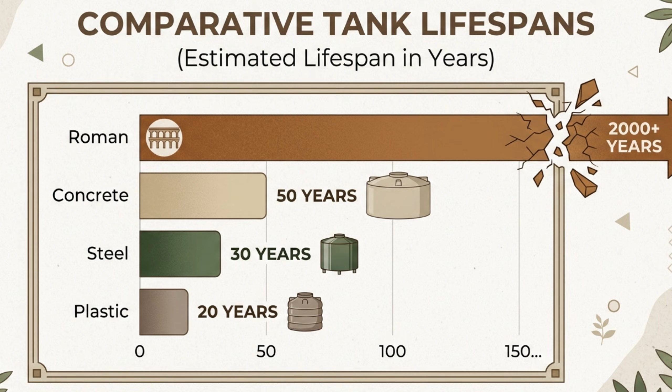There is a water tank in a small town outside Naples that has held drinking water for 2,040 years. It is bigger than a basilica. It cost the Romans almost nothing to line, and the recipe for the material that makes it waterproof is sitting in a book that has been in print since 1547.

A modern concrete water tank, the kind your county will permit, lasts about 50 years before it cracks and leaks. A plastic cistern lasts 20. A galvanized steel tank lasts 30. The Roman version has outlasted the empire that built it.

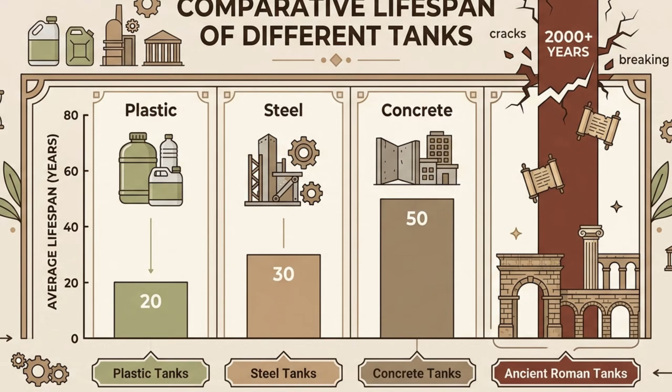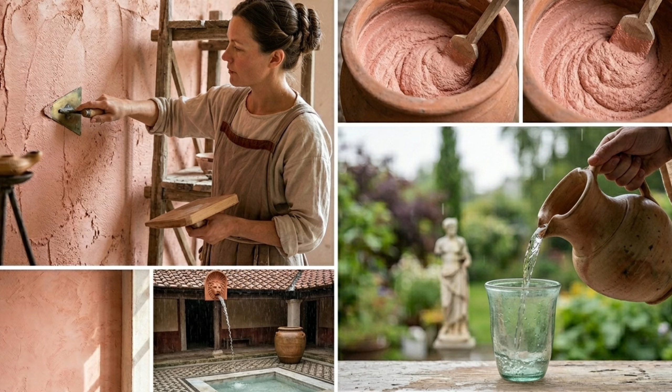Archaeologists at the Cambridge European Journal of Archaeology rebuilt the mortar in a lab 2 years ago. They confirmed what farmers in Spain, Portugal, and North Africa have known for centuries. The lining costs about $8 to mix per square foot at modern hardware store prices. It self-heals, it improves with age, and it can store rainwater clean enough to drink for an entire year without a single chemical additive.

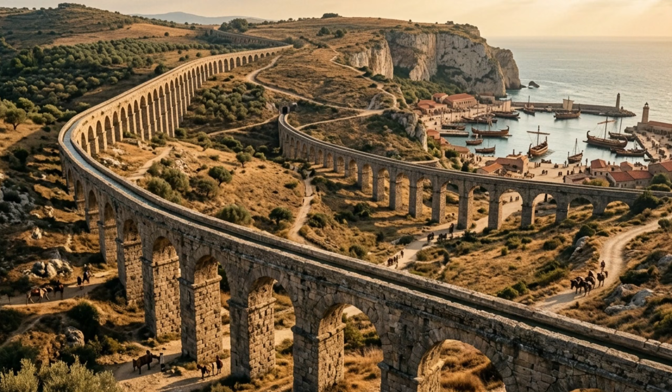So Augustus, the first emperor of Rome, ordered the longest aqueduct in the ancient world. 96 kilometers of stone channel from a spring at Serino, sloping down by gravity, ending at the top of a tuff cliff above the harbor.

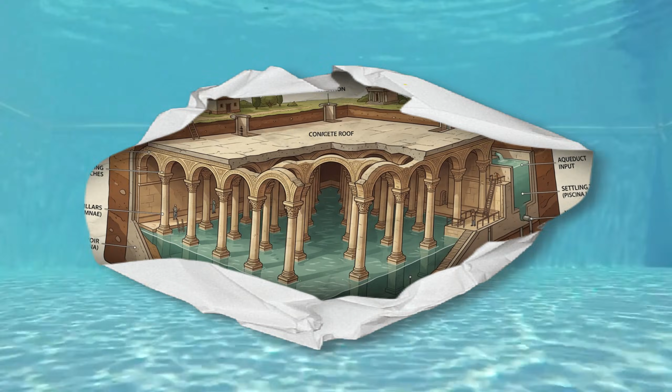And at the end of that aqueduct, they built something the locals would later call the Piscina Mirabilis, the wonderful pool. It is a single underground room carved into volcanic rock, 70 meters long, 25 meters wide, 15 meters high. 48 pillars holding up the roof. Capacity 12.6 million liters, about 3.3 million gallons.

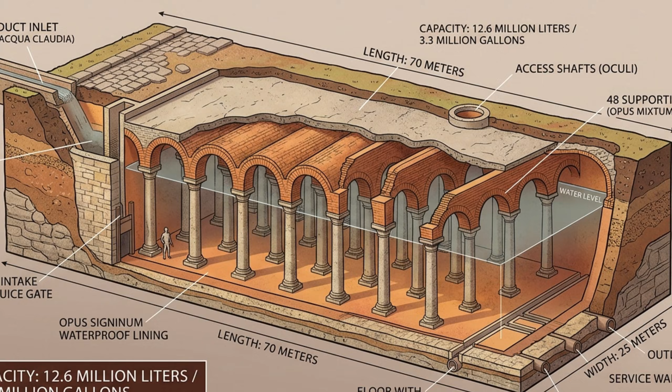Enough drinking water for 10,000 people for almost a week, with no aqueduct flowing. It was finished around 12 BC. It is still standing. Now here is the part the YouTube engineering channels never explain.

The pillars are volcanic stone. The walls are brick. The vault is concrete. None of that is special. You can do any of it badly. The miracle of this building, the reason it has not leaked in 20 centuries, is one thin coat of pink mortar troweled onto the inside walls.

The Romans called it Opus Signinum. To your eye, it looks like rough pink plaster. At the molecular level, it is something else entirely.

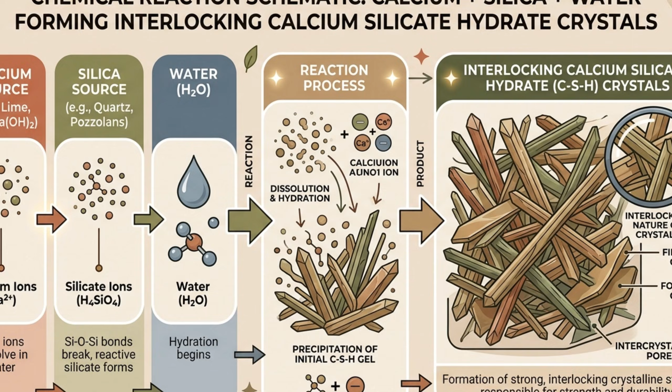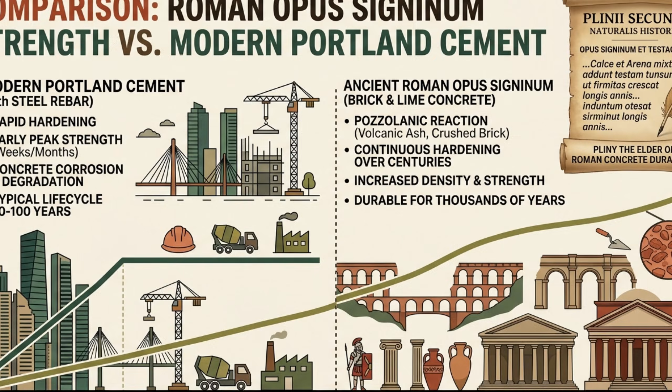It is lime, mixed with crushed terracotta pottery in a very specific ratio. When water hits the calcium in the lime and the silica in the broken pottery, a chemical reaction starts. The two minerals lock together into a compound called calcium silicate hydrate. That is the same compound that gives modern Portland cement its strength, except the Roman version keeps reacting, for years, for centuries. Meaning, every time the lining gets wet, it gets stronger.

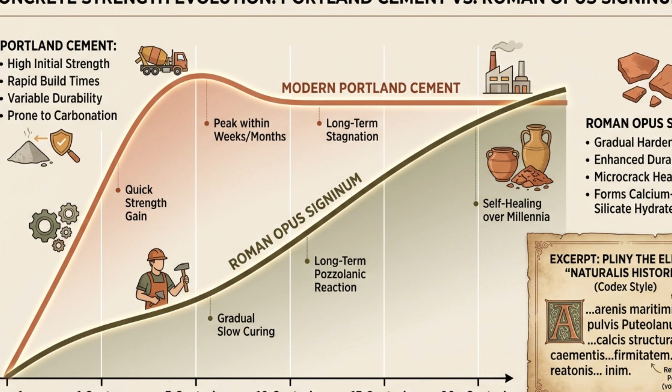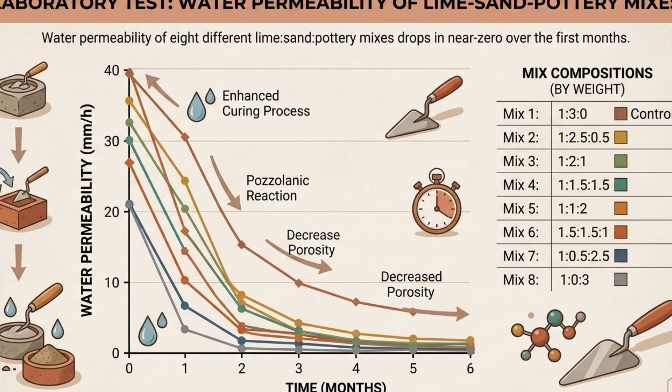Pliny the Elder wrote the recipe down around 70 AD. The Cambridge experiment in 2024 tested 8 different mixes of lime to sand to crushed pottery. The team confirmed that the right ratio creates a surface so dense that water permeation through the lining drops to nearly zero within the first few months of use.

The physics do not negotiate. You cannot evolve around a chemical bond. The lining does not biodegrade. It does not rust. It does not need a service contract. There is no filter to replace. There is no membrane to puncture. There is no pump motor to burn out. It is just stone, slowly turning into harder stone.

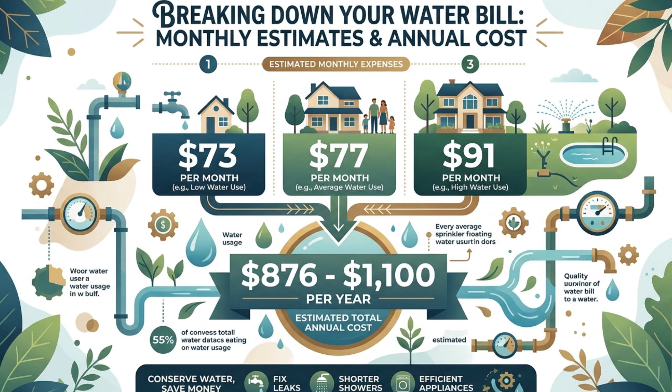And here is where the conspiracy starts. The average American household pays $73 a month for water. A family of 4 in California pays $77 a month. A family in West Virginia pays $91. That is between $876 and $1,100 a year, just for water.

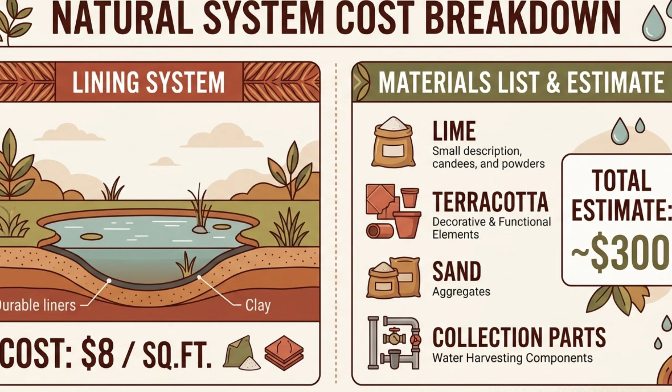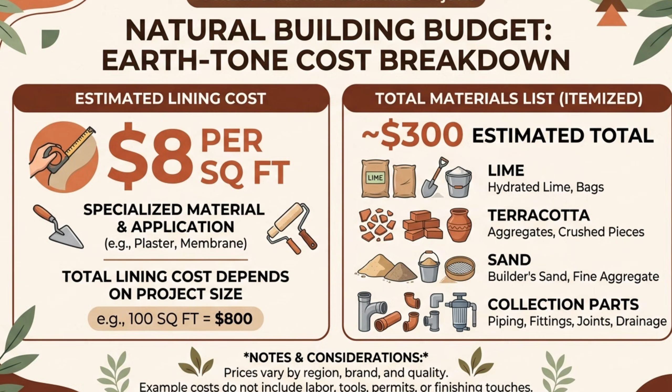Over a 30-year mortgage, that is between $26,000 and $33,000 for something that falls out of the sky onto your roof for free. A 2,000-gallon Roman cistern, sized for a family of 4, costs about $8 per square foot of lining at modern Home Depot prices. Total materials around $300 for the full build, including hydraulic lime, crushed terracotta, sand, and the food-grade collection components.

So why is every house in America plumbed to a municipal water line? Why is the bottled water industry worth over $300 billion worldwide? Why does the average American buy 167 plastic bottles of water a year at a markup of 2,000% over tap water, which itself was free water you already paid a utility company to deliver?

Why has Colorado, until 2016, made it functionally illegal to collect more than 110 gallons of the rain that falls on your own roof? You already know the answer. It is not because the design does not work.

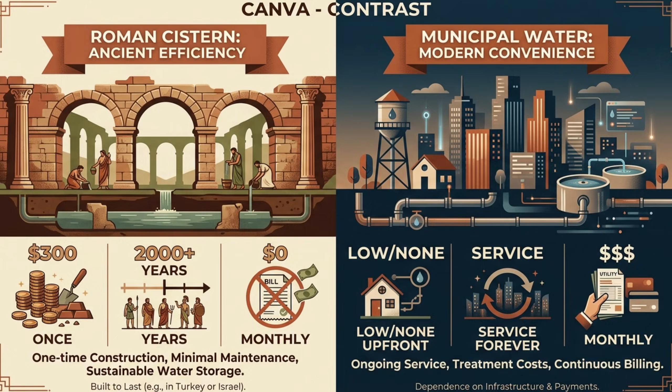The Romans built 10,000 of these across 3 continents, and 100 of them are still functional today. That's because a water tank that lasts 2,000 years, costs $300 in materials, and requires no monthly bill, is a terrible business model. That is not a coincidence. Here's how you build one.

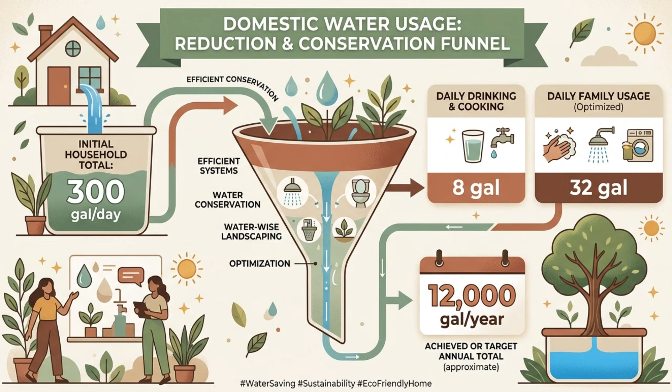Step 1: Sizing. A family of 4 uses about 300 gallons of water a day for everything, including showers, laundry, and the toilet. For drinking and cooking alone, the number drops to about 8 gallons a day, 32 gallons for a family of 4, roughly 12,000 gallons a year. A standard asphalt shingle roof of 2,000 square feet in a region with 20 inches of annual rainfall collects about 24,000 gallons a year.

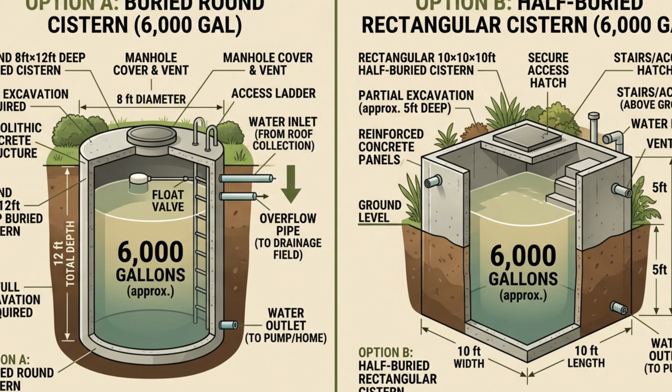Twice what you need for drinking, with overflow to spare for the garden. So your target cistern, sized for drinking and cooking with a 6-month safety margin, is around 6,000 gallons. A round chamber 8 feet across and 12 feet deep buried in the yard, or a rectangular concrete box 10 feet by 10 feet by 10 feet, half buried.

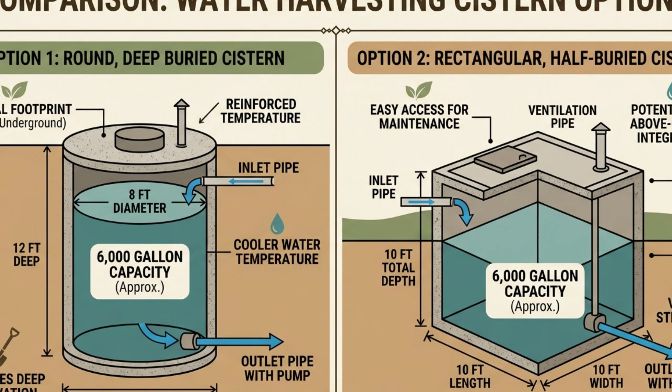Step 2: The shopping list. Hydraulic lime, sometimes labeled natural hydraulic lime or NHL 3.5, is available at any masonry supply yard for about 30 cents a pound. You will need roughly 200 pounds for a 6,000-gallon cistern, $60.

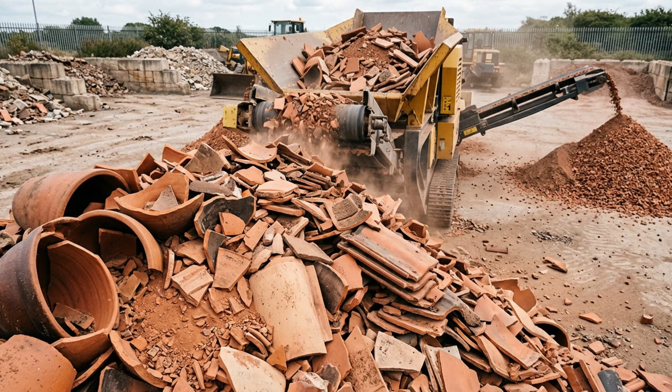Crushed terracotta, called chamotte by archaeologists, comes from broken clay pots or unglazed clay roof tiles. Free if you scavenge, about 40 cents a pound new from a pottery supply store. You will need roughly the same volume as the lime, another $60 worst case. Mason sand, the fine kind, not concrete sand, about $6 for a 60-pound bag at Home Depot. You will need 3 bags, $18.

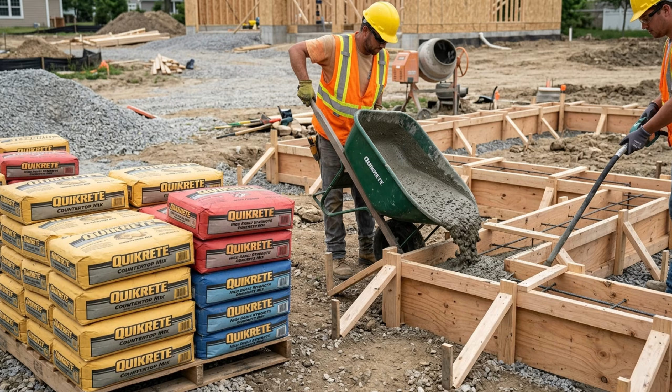The structural shell of the cistern can be poured concrete, block, or even bricked masonry. Standard Quikrete, $8 a bag, 25 bags for a 6,000-gallon vault, $200.

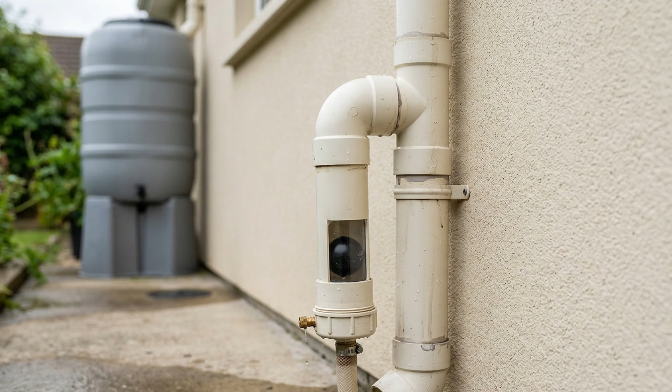A first flush diverter, the modern equivalent of the Roman Piscina Mirabilis, the small settling basin in the floor, throws out the first 10 to 15 gallons of dirty water off your roof at the start of every rain. $38 on Amazon. A simple ceramic candle filter for the final drinking water, the kind used in Berkey-style countertop filters, $45. This is the only consumable in the whole system; one candle filter lasts about 18 months.

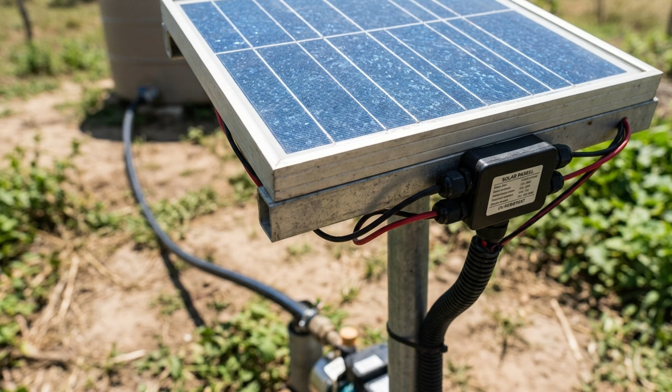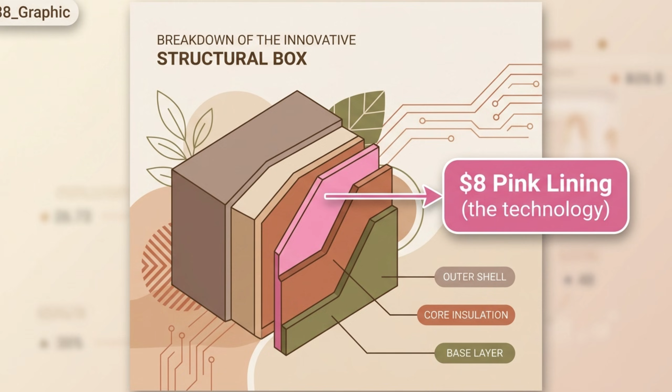A solar-powered shallow well pump, if the cistern is buried and you want pressure at the tap, $80 at Harbor Freight, optional. The Romans used gravity. Total materials cost for the full system: around $410. The $8 number in the title is the cost of the lining alone, the part the Romans considered the actual technology. Everything else is just the box that holds the water.

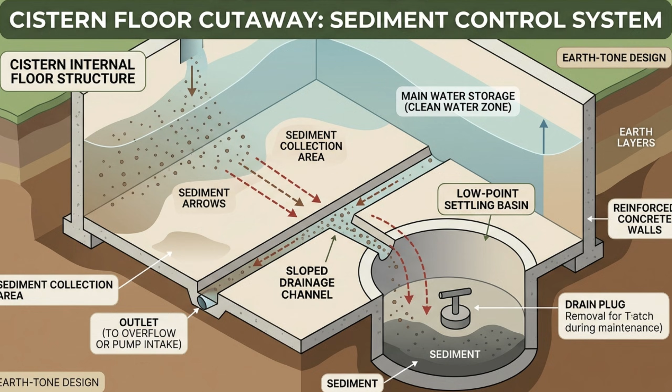Step 3: The build. Dig the hole, 6 feet deep, 10 feet by 10 feet square, with a 1-foot drainage channel sloping toward one corner. This is your Piscina Mirabilis. The Romans figured out that sediment always collects in the lowest point, so they built that point into the floor on purpose with a drain plug. You can clean 2,000 years of mud out of one of these cisterns in an afternoon.

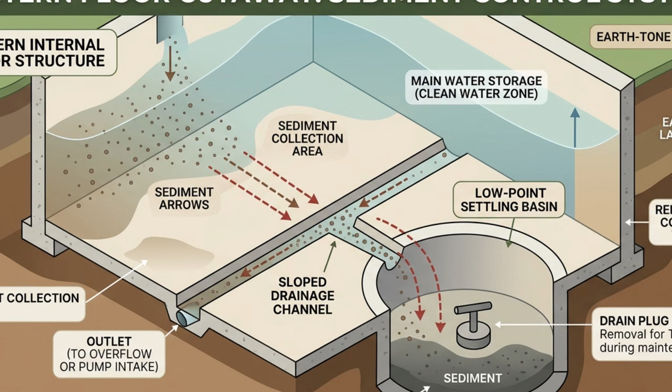Pour the structural shell: 6-inch thick walls, 8-inch thick floor reinforced with rebar. Standard residential pour, cure for 14 days. Now the part that ruins 90% of DIY cistern builds: the lining.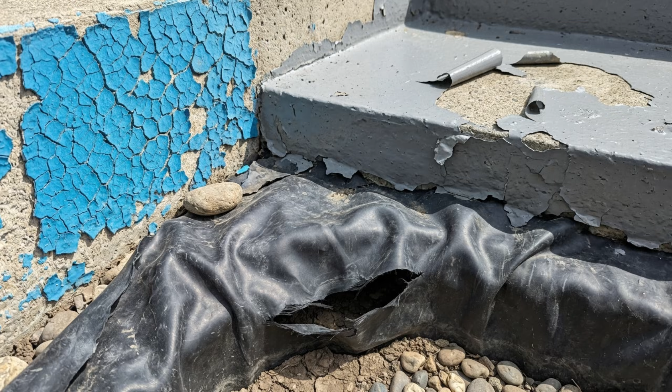Most people, when they try this, treat the inside of the cistern like a pool. They paint it with rubberized waterproofing, they coat it with epoxy, they drop in a plastic liner. All 3 of those things will fail in under 10 years. The pool paint cracks, the epoxy delaminates from the concrete underneath, the plastic liner punctures or leaches phthalates into the drinking water.

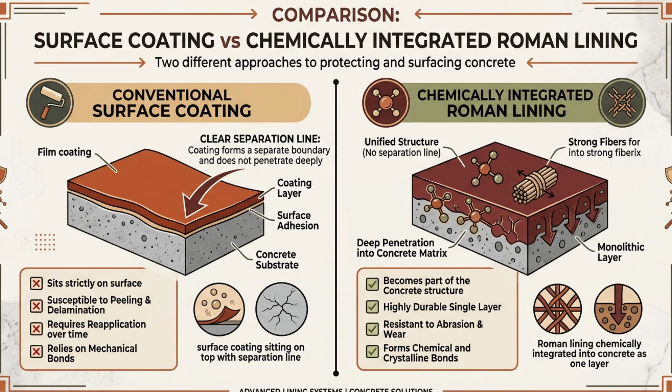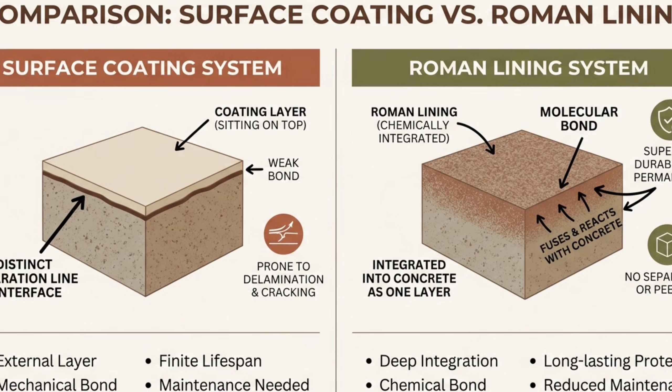The Roman lining does not seal the surface, it becomes the surface. It chemically bonds with the calcium in the underlying concrete and creates a single integrated layer that gets denser over time. Here is the ratio that the Cambridge experiment confirmed as optimal: 3 parts hydraulic lime, 2 parts mason sand, 1 part crushed terracotta by volume.

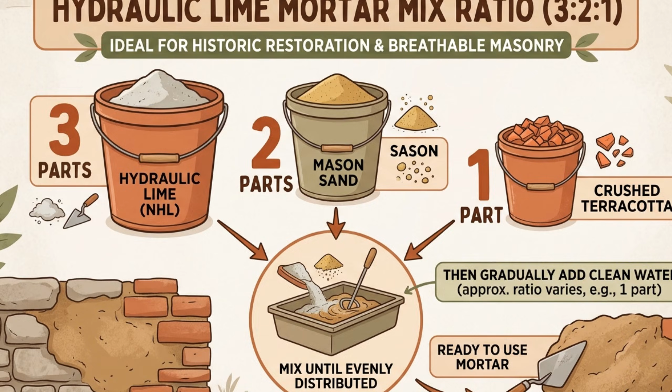Mix it dry first, then add water slowly until it has the consistency of cake frosting, not soup. Frosting. Trowel it onto the inside walls and floor in a layer about half an inch thick. Work in one section at a time so the lime does not start curing in your bucket. The first coat will dry to a dusty pink.

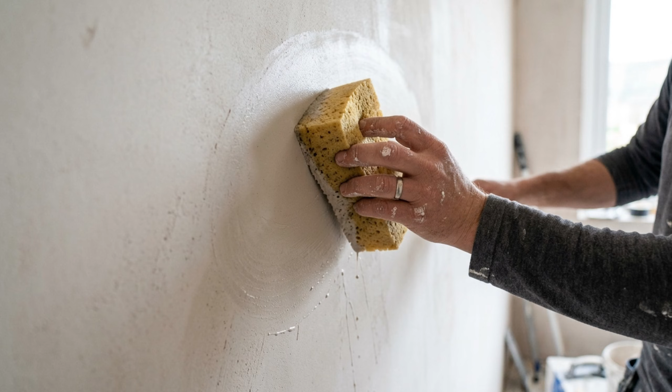After it dries for 48 hours, polish the surface with a damp sponge. This closes the pores. The Romans called this technique smoothing, and it is the difference between a cistern that holds water and a cistern that weeps through every microcrack.

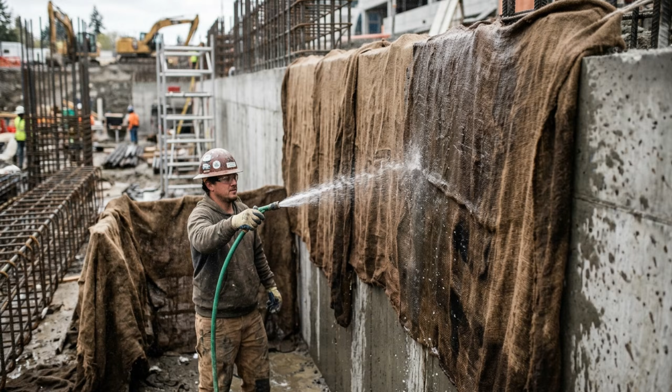Let the lining cure under wet burlap for 21 days. Spray it with water twice a day. This is not optional; lime cures by hydration, not evaporation. If you let it dry too fast, it will be brittle. Slow and wet is the entire trick.

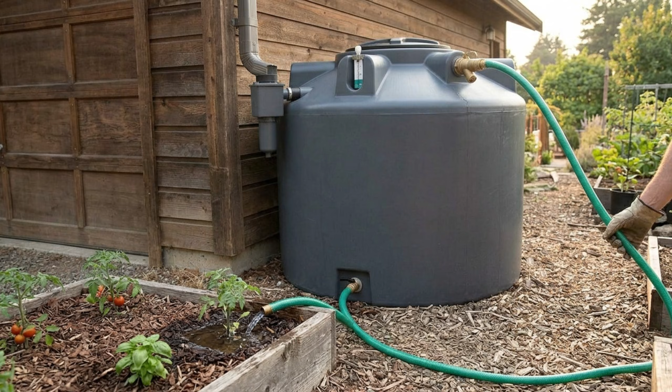After 3 weeks, fill the cistern with rainwater. Run the first full tank to the garden, the second full tank too. By the third fill, the lime will have leached out enough of its initial alkalinity that the water inside the tank will sit at a pH of around 7.5. Slightly basic, drinkable.

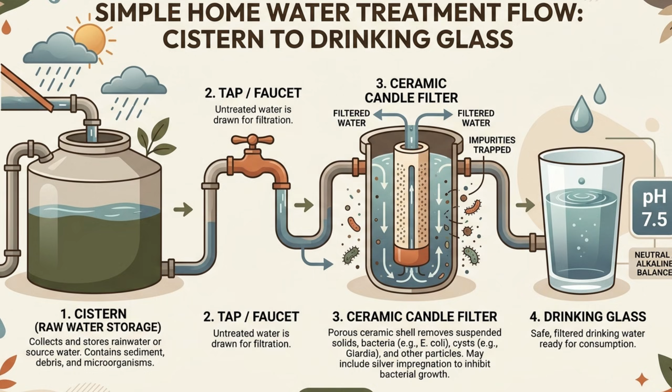For potable use, run the output through a single ceramic candle filter at the tap. That is the entire treatment train.

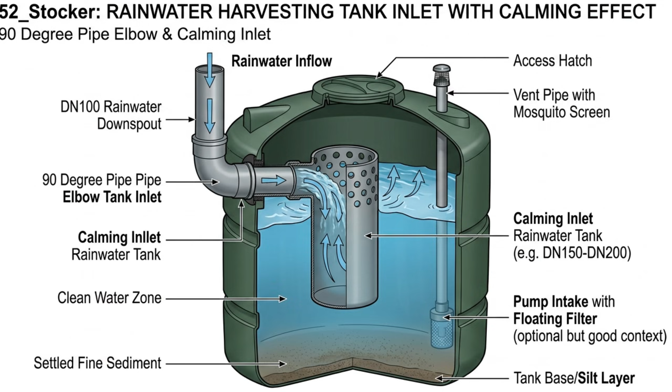Step 4: The connection. Roof gutters feed into a downspout. Downspout feeds into the first flush diverter. The diverter dumps the first 10 to 15 gallons of dirty rain into the garden, then automatically switches the flow into the cistern intake. Inside the cistern, the water lands on a calming inlet, which is just a 90-degree pipe elbow pointed sideways, so the incoming water does not stir up the settled sediment on the bottom.

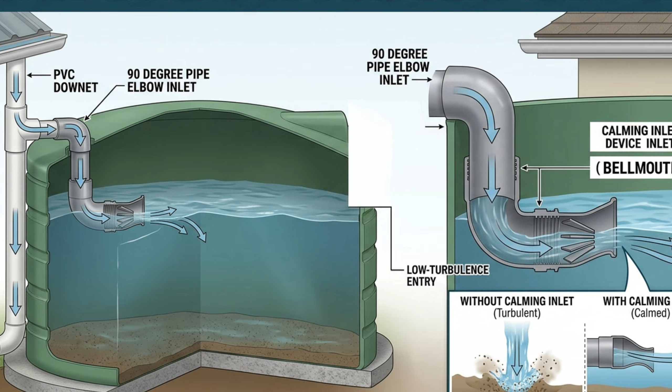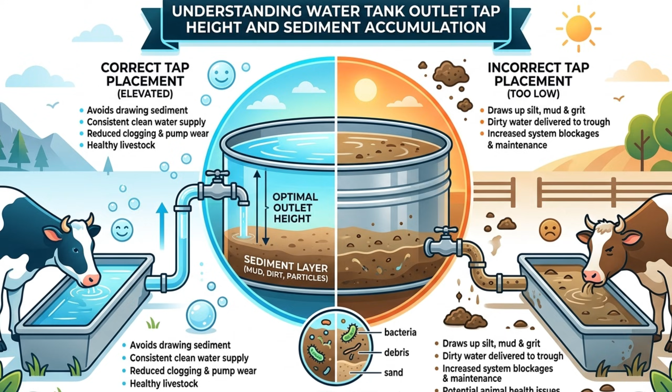The output is a tap at the height of about 4 inches above the floor of the cistern, never at the bottom. The bottom is where the sediment lives. The Romans figured this out 2,000 years ago, and modern plastic tank manufacturers still get it wrong on entry-level tanks.

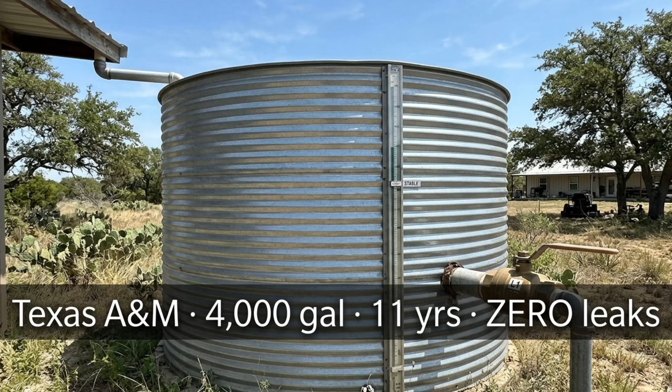For variations: if you live in a freeze zone, bury the cistern below the frost line, which is between 3 and 6 feet depending on your latitude. If you live in a high rainfall zone like the Pacific Northwest, downsize to 4,000 gallons. If you live in the desert, increase your roof catchment area instead of the tank size. A bigger roof beats a bigger tank, almost every time.

Now here are the real numbers from real builders. A family of 4 in Central Texas, documented in a Texas A&M extension report, has been running a 4,000-gallon cistern with a hydraulic lime lining for 11 years. 0 leaks. Annual water test results consistent with EPA potable standards after ceramic filtration. Total operating cost over 11 years: $67 in replacement filter candles.

A homestead in southern Spain, documented in the same Archaeopress volume on Western Mediterranean water systems published in 2025, has been running a Roman-style domestic cistern continuously since 1974. Same lining, never been resealed. Holds rainwater clean enough to drink off the tap without filtration in the dry months when sediment has fully settled.

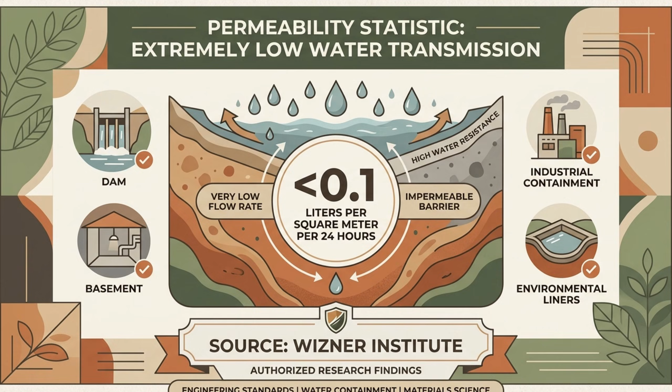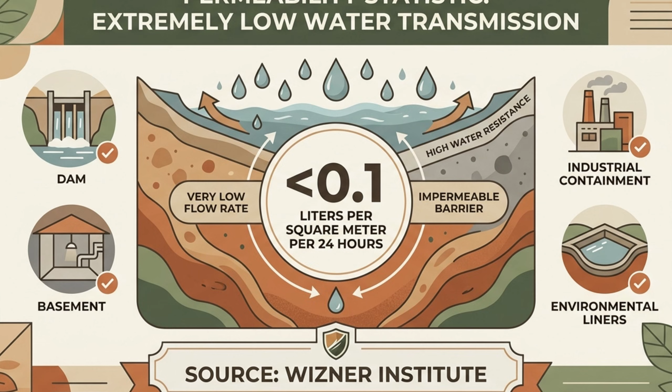The Wizner Institute, which studies historical water engineering, has measured the surface permeability of original Piscina Mirabilis mortar at less than 0.1 liters per square meter per 24 hours. That is 15 times tighter than the modern EPA standard for potable water storage tanks. 2,000-year-old technology beating the modern code by a factor of 15.

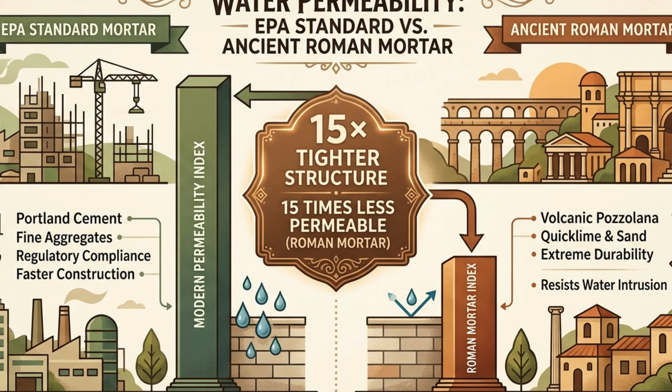The honest limitations. This is not a magic system. There are 3 places it will not work, and you need to hear them. First, if your annual rainfall is under 10 inches and your roof is under 1,500 square feet, you cannot make the math work. Roman cisterns in the Sahara Desert worked because they were paired with massive paved courtyards, specifically designed to channel every drop of dew and runoff into the tank.

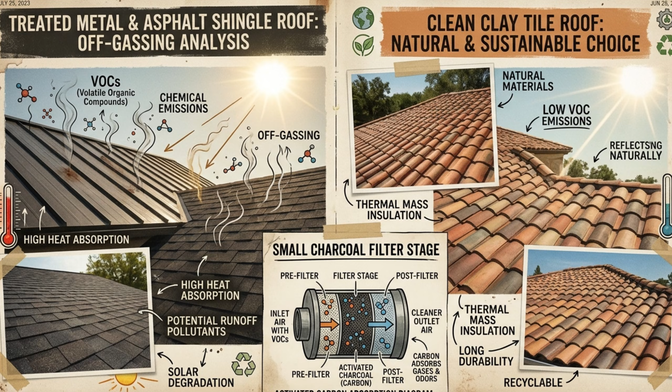Without that catchment area, you will not collect enough to drink. Second, if your roof is made of treated metal, asphalt shingle with zinc strips, or any material that off-gases chemicals, the first flush diverter is not enough. You will need either a roof material change to clay tile or metal with food-grade coating, or a charcoal filter stage between the diverter and the cistern.

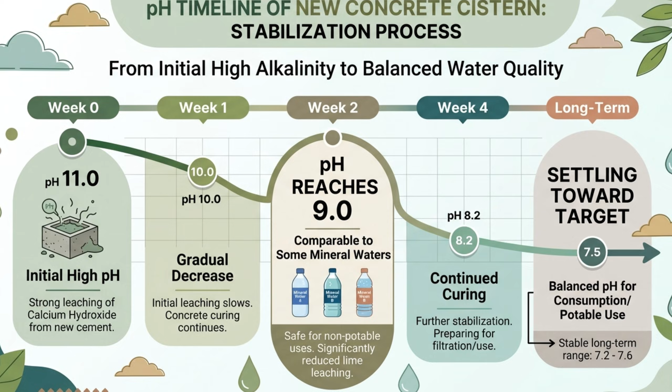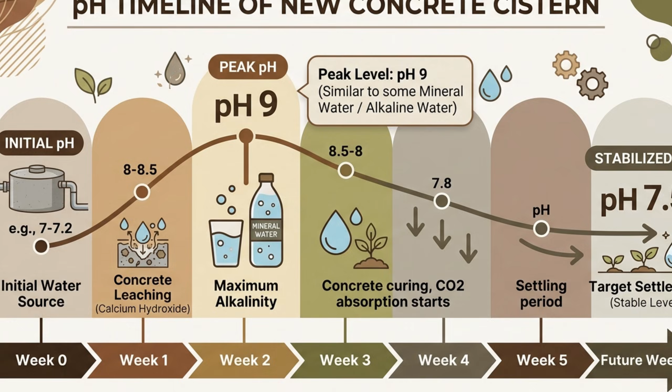Third, the lime in the lining will leach into the water for the first 90 days. The water will be slightly alkaline. It is not dangerous. The pH at week 2 of a new cistern will hit 9, which is the same as some bottled mineral waters, but it tastes strange. Do not drink it until the third fill, and run it through the ceramic filter even then.

I am telling you this because this channel always gives you the full picture. A Roman cistern is not a plug-and-play purchase. It is a construction project that pays for itself in 11 months at the average American water bill, and then keeps paying for itself for the next 2,000 years.

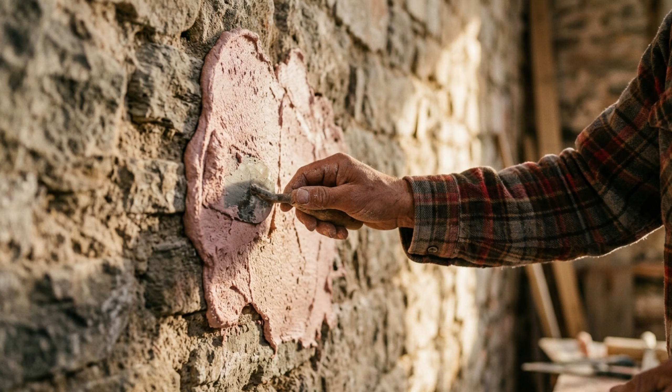Here is the part that stays with me. 2,040 years ago, an engineer in a Roman naval base mixed lime with broken pots and troweled it onto a stone wall above the Bay of Naples. He probably thought he was just doing his job.

He could not have known that his work would still be holding water after the fall of his empire, after the Dark Ages, after the Renaissance, after the discovery of the New World, after the invention of the printing press, the steam engine, the light bulb, and the internet. That knowledge moved through Roman engineers to Byzantine architects to medieval Spanish farmers to North African colonists for 20 centuries.

And then in the late 1900s, in the rush to wire every American home to a municipal water grid, the knowledge stopped moving. It did not disappear. It just stopped being profitable to teach.

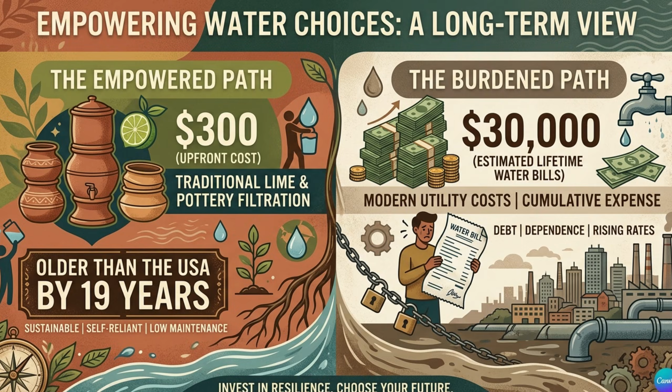Now, you have it back. You know that $300 of lime and broken pots can replace a $30,000 lifetime water bill. You know that the technology is older than the United States by 1900 years. You also know what a $300 billion bottled water industry depends on you not knowing.